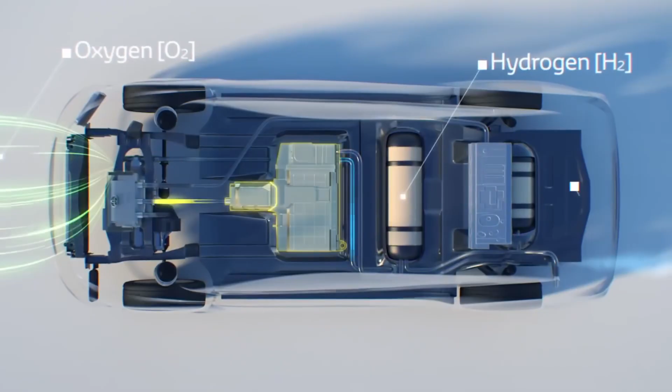And that's what we're going to talk about today. We'll dig into history, find out when humans first obtained this chemical element in its pure form, who invented the first hydrogen engine, and so on. We'll look at the advantages and disadvantages of this type of fuel, both from the production side and from the application side. And together, we'll try to clarify whether hydrogen is really the bright future that they are painting for us.

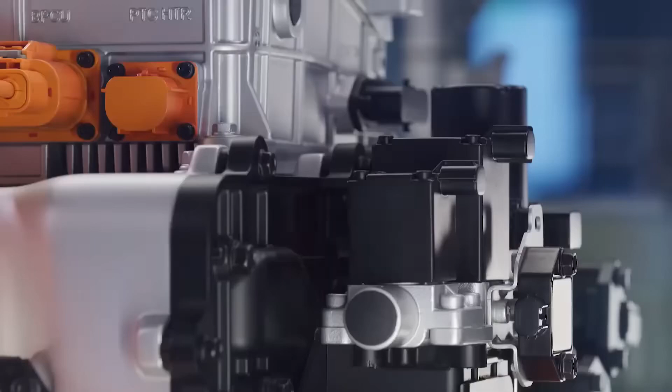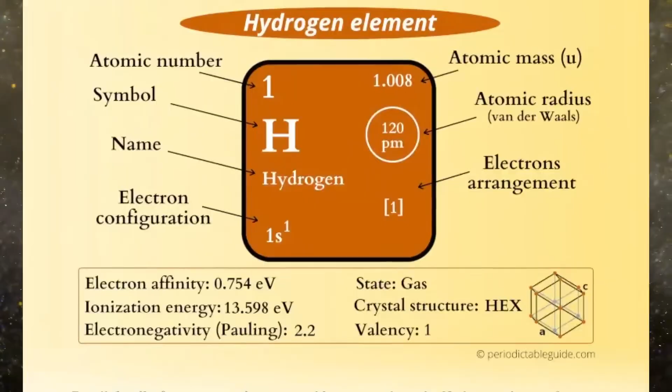Hydrogen, chemical symbol H, from the Latin hydrogenium, is a chemical element in the first period of Mendeleev's periodic table of chemical elements, with atomic number 1. Hydrogen is the most common chemical substance in the universe. It makes up 75% of the mass of all baryonic matter. Stars, except for compact ones, are mainly composed of hydrogen plasma. Hydrogen is the lightest element in the periodic table.

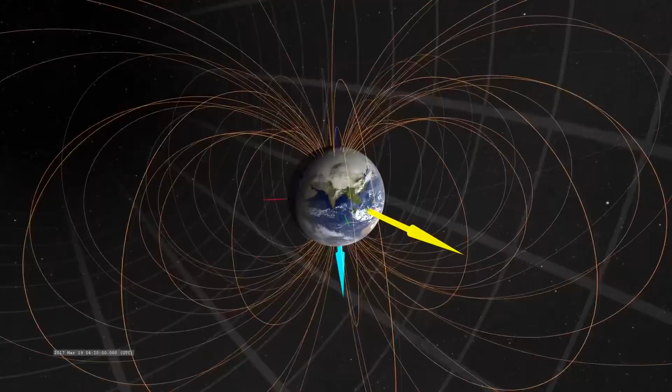However, despite being so common in the universe, it is difficult to find pure hydrogen on Earth. This element readily forms covalent bonds with most nonmetals. Therefore, in our reality, it exists in the form of organic and inorganic compounds. Water is the most vivid example among inorganic compounds. Since gaseous hydrogen is extremely light, it gradually escapes from the Earth's atmosphere. Every second, under the influence of the solar wind, the Earth loses 3 kilograms of hydrogen, which in the distant future will lead to the drying out of the planet.

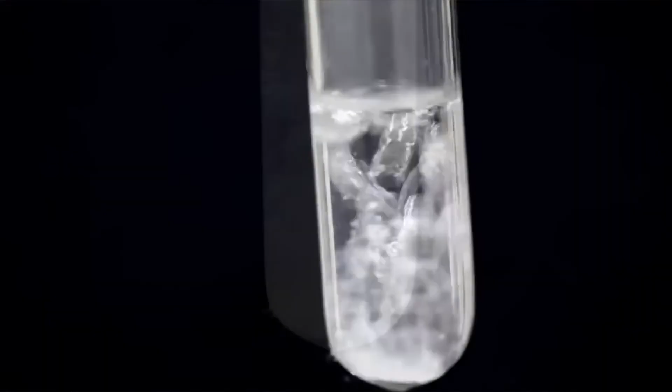Since most of the hydrogen on Earth is found in molecular compounds, it was discovered relatively late. The release of a flammable gas during the reaction between metals and acids was observed as early as the 16th century, during the formation of chemistry as a science. In 1766, the famous English scientist Henry Cavendish conducted a reaction between zinc and hydrochloric acid and studied the flammable gas produced. Cavendish called it inflammable air. When burned, this gas produced water, but Henry did not draw the correct conclusions and did not realize he had discovered a new substance.

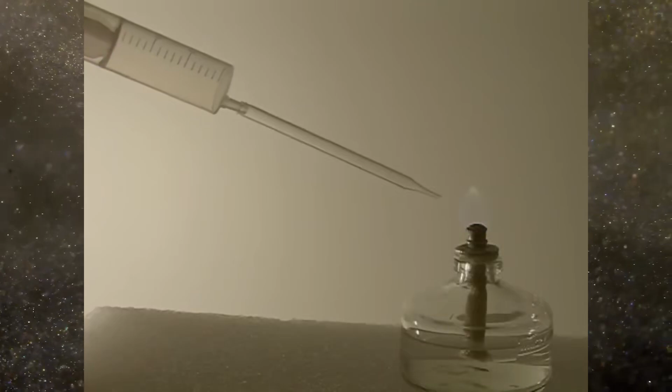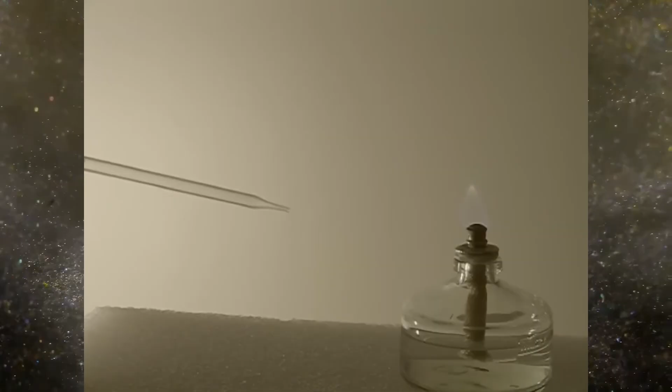The French chemist and naturalist Antoine Lavoisier, together with engineer Jean Meusnier, used special gasometers to synthesize water in 1783, and later analyzed it by decomposing water vapor with heated iron. Thus, the scientists were able to reach the correct conclusions. They established that flammable air is not only a component of water, but can also be obtained from it. In 1787, Lavoisier suggested that the gas under study was a simple substance, and accordingly belonged to the group of primary chemical elements. He called it hydrogen, which literally means water former.

And the combustible properties of this light gas could not go unnoticed by scientists and engineers. Moreover, with the development of applied sciences, the first prototypes of internal combustion engines began to appear, and at first, all sorts of things were used as fuel for them.

Hydrogen has long been considered one of the most promising types of fuel. Its combustion is extremely efficient, and the result is water vapor. And that's great news for environmentalists.

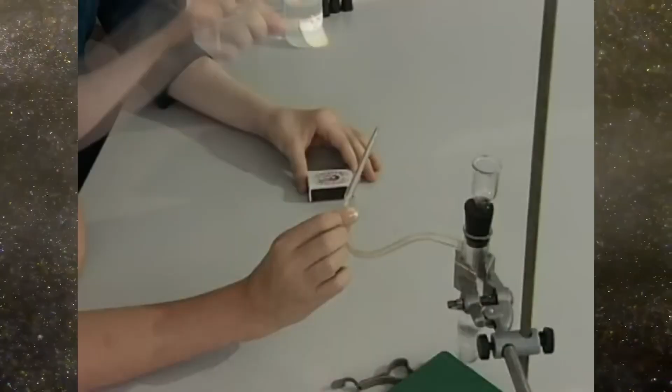The specific heat of combustion of hydrogen is about 120 to 130 megajoules per kilogram, which is several times higher than that of hydrocarbon fuels.

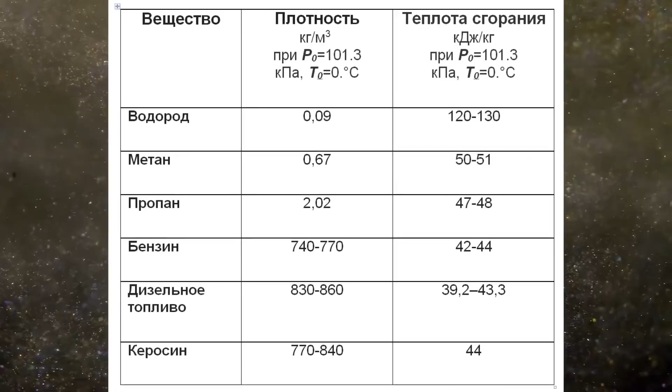Here's a quick table I put together that shows the most common types of fuel, along with their density and specific heat of combustion. Pay attention to the density. For example, methane is 7.5 times denser than hydrogen. So what conclusion can we draw from this? It's quite simple: using higher hydrocarbons makes the storage tank more compact, which is an important detail for vehicles.

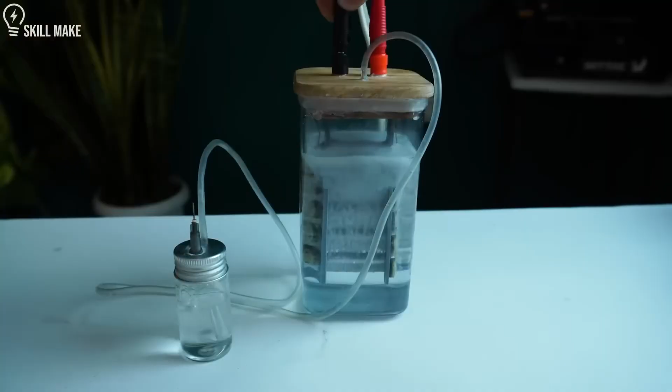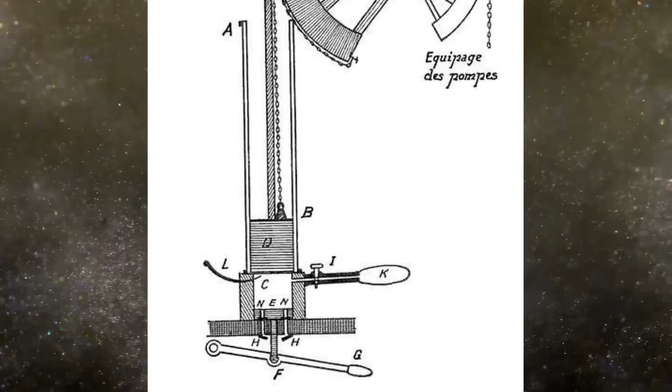Let's delve a little into history. The first engine running on hydrogen was invented in 1806 by the French inventor François Isaac de Rivaz. He produced hydrogen using water electrolysis. His engine was the first to use solutions that are still used in modern internal combustion engines, such as the piston group and spark ignition. However, the crank mechanism was not yet included in the design.

In 1807, de Rivaz equipped an experimental vehicle with such an engine, and in the same year he applied for a patent called the use of the explosion of lighting gas or other explosive materials as a source of energy in an engine. I want to emphasize that the first internal combustion engines were quite primitive and unreliable.

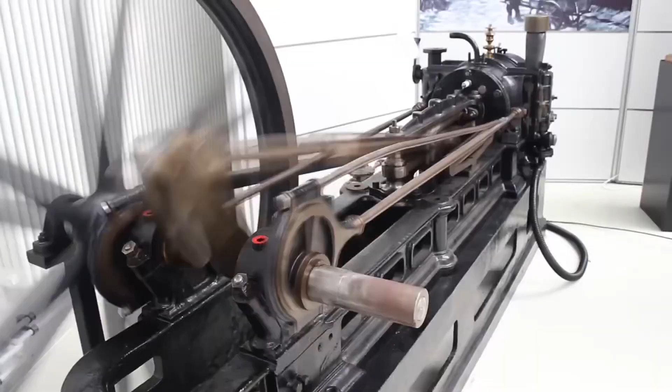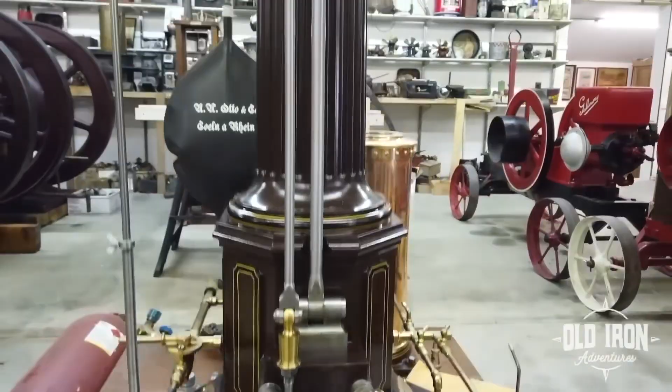It was considered a success if it could run on its own for at least 20 or 30 seconds. And only thanks to numerous attempts, improvements, and the work of hundreds and thousands of engineers did humanity eventually arrive at engines that could last for 1,000,000 kilometers.

The first patent for a hydrogen engine was issued in the United Kingdom in 1841. In 1852 in Germany, they built an internal combustion engine that ran on an air-hydrogen mixture. 8 years later, in 1860, the French inventor Étienne Lenoir designed the Hippomobile, the first versions of which ran on hydrogen.

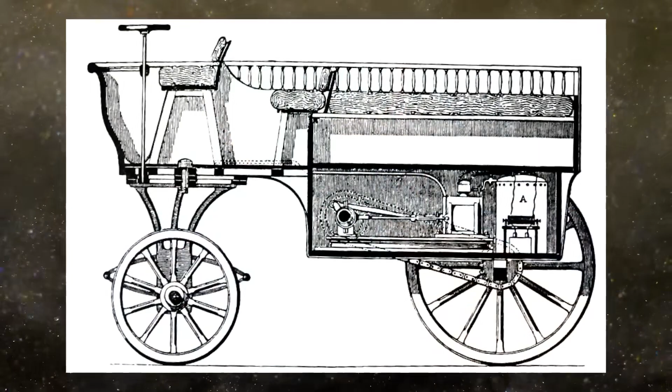The fuel gas was produced by electrolysis, which is where the name Hippomobile comes from - the ancient Greek hippos, meaning horse, because the vehicle constantly needed to drink. Later, Lenoir's car was adapted to run on illuminating and coal gas, and these models gained some recognition among buyers. For example, one of Lenoir's cars was made for the court of the Russian Emperor Alexander II.

In 1863, Lenoir tested the Hippomobile, driving it for 18 kilometers near Paris. Taking into account the stops along the way, the trip took 3 hours and required a huge amount of fuel.

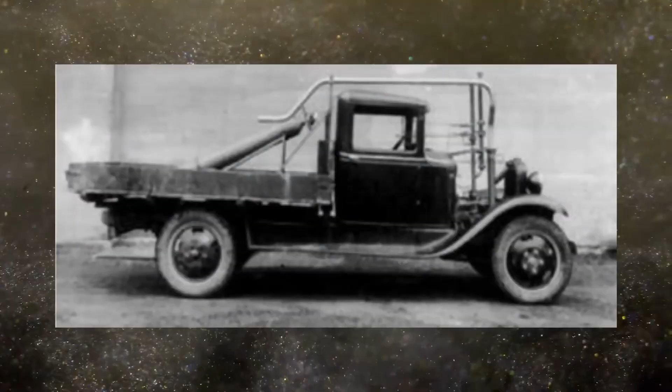In 1933, the Norwegian oil, gas, and metallurgical company Norsk Hydro converted one of its small trucks to run on hydrogen. The chemical element was produced by reforming ammonia and supplied to the engine.

In Leningrad, during the blockade, about 600 balloons operated on an air-hydrogen mixture. This solution was proposed by military engineer Boris Shelishch to solve the problem of gasoline shortage, which had already become scarce by the autumn of 1941. He also converted about 200 GAZAA trucks to run on hydrogen, as well as all the winches in the city.

In 1942, Shelishch was sent to Moscow to implement his technology in the Moscow air defense units. In the winter of 1941, the junior military technician was awarded the Order of the Red Star for his submitted R&D proposal.

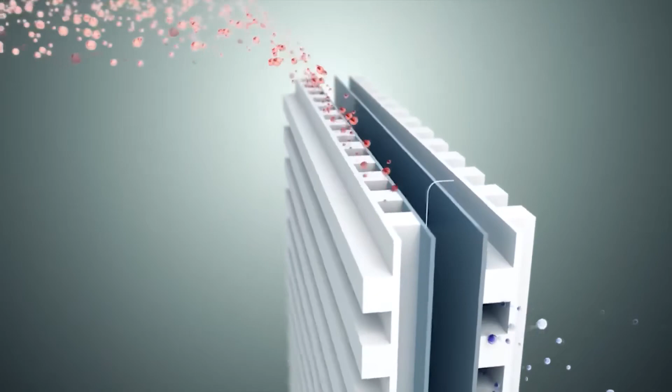However, everything we've discussed so far was based on the combustion of hydrogen in the cylinders of an internal combustion engine. But there is another way to generate energy: hydrogen fuel cells. They directly convert the chemical energy of the hydrogen oxidation reaction into electric current without the combustion process.

By the way, water will also be produced at the output of such a device, and you'll be surprised at how long ago such a fuel cell was invented - as far back as the year 1839. That's when the Welsh inventor Sir William Robert Grove developed the Grove cell.

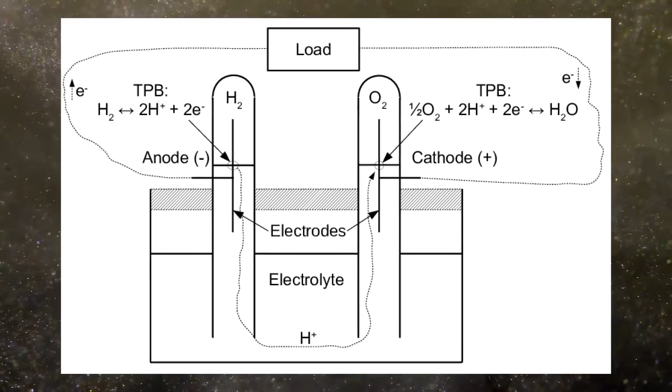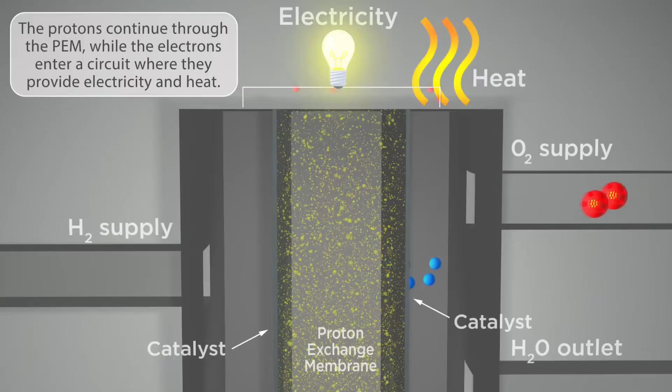William experimented with different types of electric batteries and discovered a potential difference on platinum plates immersed in a mixture of hydrogen and oxygen. It was only in the 1920s that research into fuel cells led to the development of solid oxide fuel cells, increased efficiency, and output levels that could be considered suitable for practical use.

In its quest to generate electricity through chemical reactions, the American company Allis-Chalmers, which produced machinery for various industries such as construction, agriculture, resource extraction and processing, as well as power generation and transmission, began research on hydrogen fuel cells in 1951.

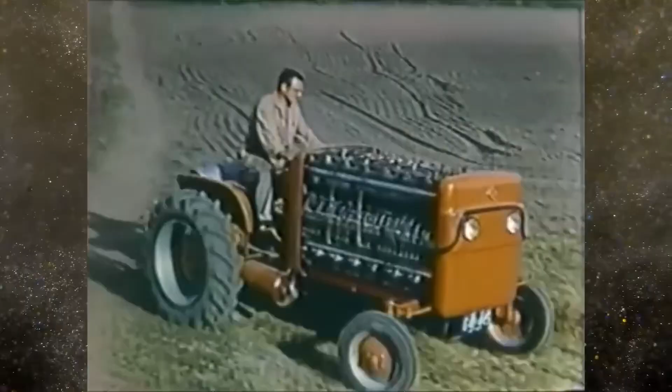On October 15, 1959, engineers from the Allis-Chalmers Research Division presented a hydrogen fuel cell tractor. This fuel cell tractor plowed a field of alfalfa with a two-bottom plow. It was an amazing sight - everything happened without the roar of engines, without a cloud of exhaust.

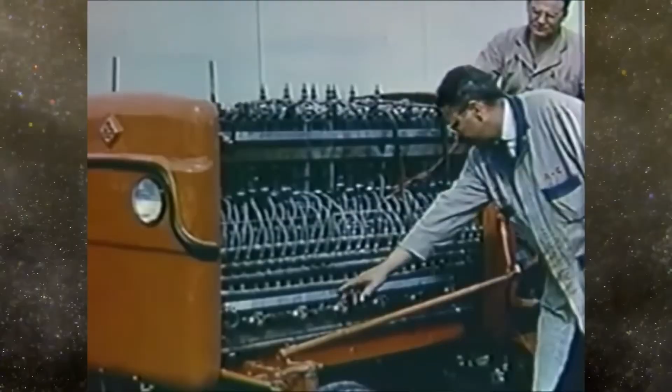The tractor housed 1,008 fuel cells combined into 112 blocks, each with 9 cells, arranged in 4 units, which generated power for a standard Allis-Chalmers 20 horsepower direct current motor.

For mass production, this tractor was extremely expensive, but it became a stepping stone that took the company to a new level. Allis-Chalmers developed fuel cells for the space program, and the United States military also contracted for some experimental fuel cell equipment. Subsequently, in the 70s, the company shut down the division and sold it to Teledyne Corporation due to funding cuts. After conducting tests, Allis-Chalmers transferred the fuel cell tractor to the Smithsonian Institution.

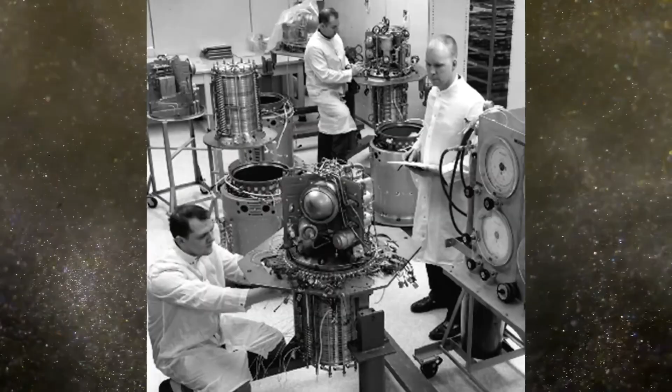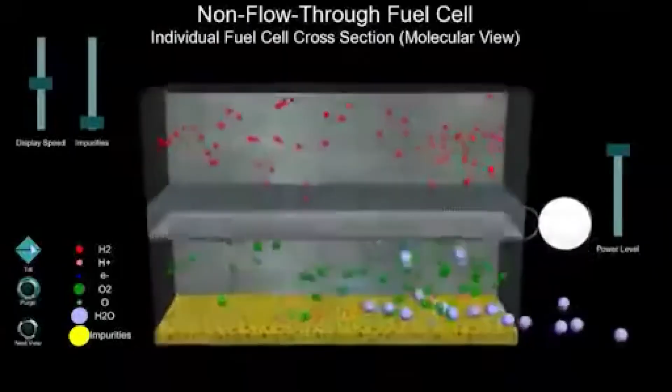The English engineer Francis Bacon, building on previous research, expanded the concept of the hydrogen fuel cell. His final design, the Bacon cell, was improved in 1959. Its fundamental principles were used in the development of fuel cells employed by NASA in their rockets. Hydrogen fuel cells for space had an interesting side effect: in addition to generating electricity, they produced water, which astronauts later drank.

I wonder if there will be commenters under the video who believe that humans have never been to space.

It was NASA's involvement that made hydrogen fuel cells a viable commercial resource. In the 1960s, the agency funded more than 200 research contracts, which gradually led to the creation of more compact and efficient hydrogen fuel cells that could be installed in cars, airplanes, and other vehicles. The first hydrogen fuel cell car was the Electrovan by General Motors in 1966.

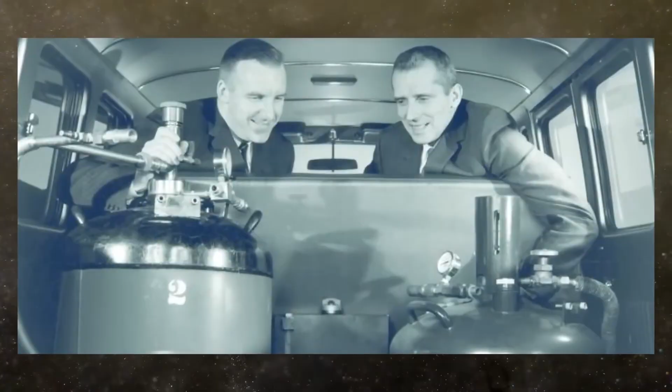The Electrovan was the brainchild of Dr. Craig Marks, who led most of General Motors' advanced engineering projects. Marks, together with 250 employees, developed the Electrovan for more than 2 years. The Electrovan used a fuel cell made by Union Carbide, which ran on supercooled liquid hydrogen and liquid oxygen.

Today's fuel cells use less pure oxygen, which is found in the surrounding air. The Electrovan had one large tank for hydrogen and one for oxygen. There were about 168 meters of piping running through the vehicle, and in fact, the 6-seat van was so packed with equipment that it could barely fit 2 people. The van was capable of driving up to 193 kilometers on a single fill-up.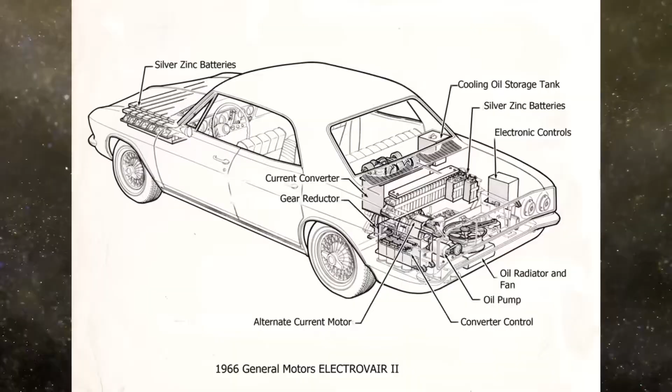It was built as a one-off technology demonstrator, and for safety reasons, was only driven within the factory grounds. General Motors had plans to equip and release a small batch with a similar setup, but the system was enormous. There were also multiple instances of hydrogen and oxygen leaks on the Electrovan prototype, and once there was even an explosion of the hydrogen tank.

Interest in hydrogen increased during the fuel crisis in the 70s, when an organization of the petroleum exporting countries' oil embargo led to an international shortage and rocked the industry. In the 70s, work was also being done in the Soviet Union to create prototypes of equipment running on hydrogen. During this period, various organizations, scientific institutes, and automotive institutes created prototypes of cars running on hydrogen and gasoline-hydrogen mixtures.

Among them were the Zhiguli, the 412th Moskvich, the 24th Volga, the Gorkovsky Avtomobilny Zavod 69, the RAF, and Ulyanovsky Avtomobilny Zavod minibuses, as well as the Zavod imeni Likhachova 130 truck. I'll say a little more about a couple of these prototypes.

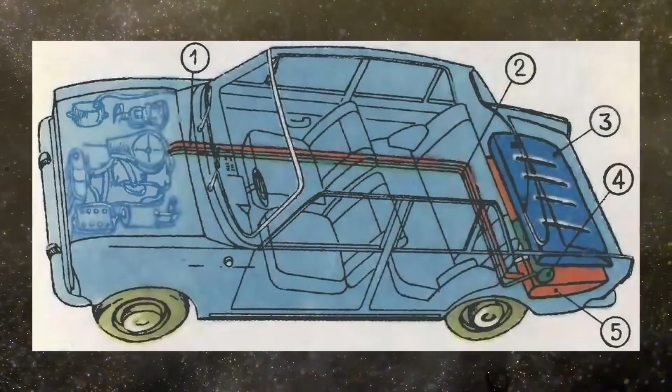In 1976, specialists from the Institute of Mechanical Engineering Problems of the Academy of Sciences of the Ukrainian Soviet Socialist Republic in Kharkiv built an experimental Moskvich 412 car with a power unit running on hydrogen. In addition to the usual gas tank, a mini reactor containing catalytic elements was installed on the Soviet sedan. Water passing through this reactor was split into hydrogen and oxygen, which then burned in the cylinders of the internal combustion engine. It is noteworthy that the fuel system for supplying hydrogen was installed in parallel with the standard gasoline system.

Starting from 1976, work was done on converting the RAF 2203 minibus to run on hydrogen fuel. Starting from 1979, it underwent laboratory and road tests as well as trial operation. Soviet scientists noted that the gasoline-hydrogen system showed low exhaust toxicity: carbon monoxide was reduced by 23 times and nitric oxide by 5.3 times. Fuel efficiency was also noted. Several hydrogen minibuses served the Olympic Village in 1980.

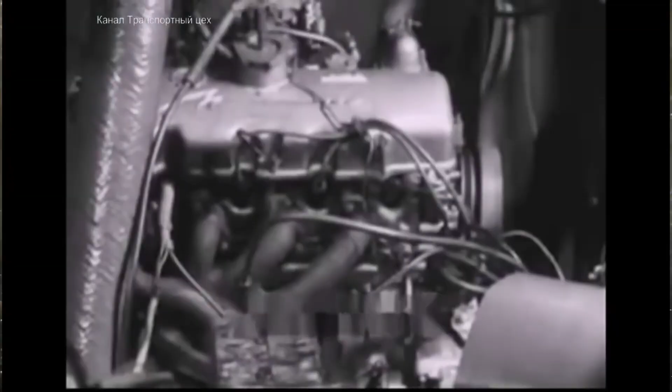Work was also underway in the Soviet Union on a hydrogen system for aviation. It was tested on a prototype Tu-155. A production car engine runs on hydrogen just like it does on gasoline. In 1979, the first BMW car with a hydrogen engine appeared.

This experimental prototype was created by engineers together with the German Aerospace Center based on the 520/4 model. On the outside, the car was hardly different from its gasoline counterparts, but its four-cylinder engine ran on hydrogen.

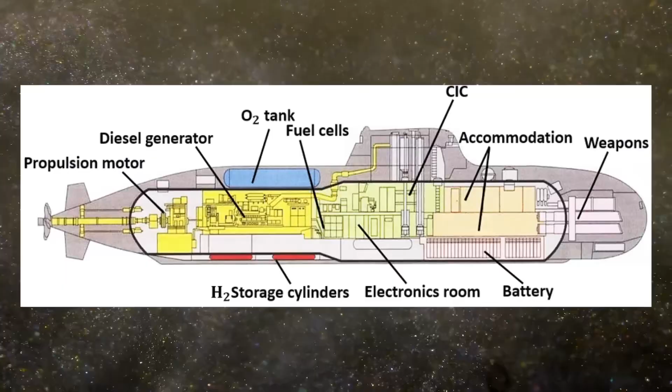However, after the fuel crisis ended, the idea of alternative engines was forgotten until the 2000s. The 21st century led to a significant boom in research and implementation of hydrogen fuel cells. In 2004, the German fleet tested a hydrogen-powered submarine, and China tested the world's first hydrogen train in 2015.

In 2007, BMW released a limited series of Hydrogen 7 cars that could run on both gasoline and hydrogen. But the car was not cheap, and the 8-kilogram gas cylinder was only enough for 200 to 250 kilometers.

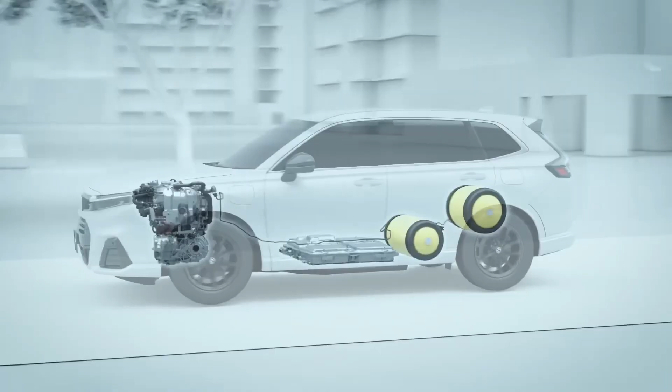The first mass-produced car model with a hydrogen engine was the Toyota Mirai, released in 2014. Today, hydrogen models exist in the lineups of major car manufacturers such as Honda, Hyundai, Audi, BMW, and Ford. Even a Russian premium car as a prototype was equipped with hydrogen fuel cells.

After 10 minutes of my story about various prototypes and the research of scientists in the field of hydrogen fuel, work on which has been going on for at least 100 years, a perfectly logical question arises. Why the heck is humanity still driving on gasoline and diesel? Well, lately a bit on electricity too. Why, despite many years of work and research, does sacred hydrogen still remain the fuel of the future and not of today? Let's figure out what's wrong with hydrogen.

How does hydrogen fuel look to the average person who hasn't really delved into the topic and has only heard about it from television news, eco-propaganda, on the internet, reels, and shorts? Hydrogen is the fuel of the future. It's eco-friendly. It's an inexhaustible resource. Not a single polar bear, pink flamingo, or unicorn will die because of such a car. And if you're thirsty, you can just suck on the exhaust pipe of this vehicle, because pure water comes out of it. Here's the approximate context.

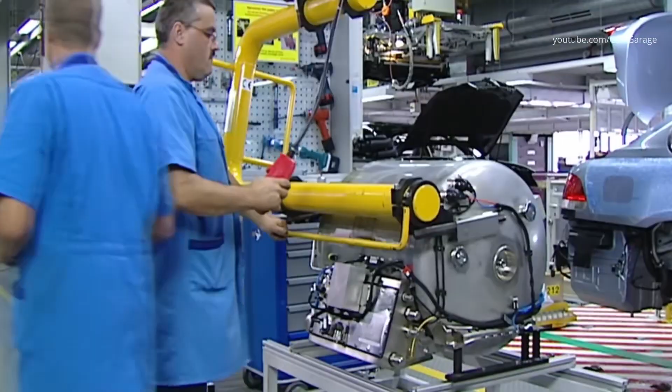Now let's go backstage and break it down step by step. The first obvious problem with hydrogen is that you can't just extract it from the earth, the ocean, or the atmosphere. It's not like natural gas or oil where you drill a well and pump the stuff through pipes. Hydrogen on Earth is bonded in molecules with other substances, and you need to apply a certain amount of energy to break those molecules apart and get pure H2.

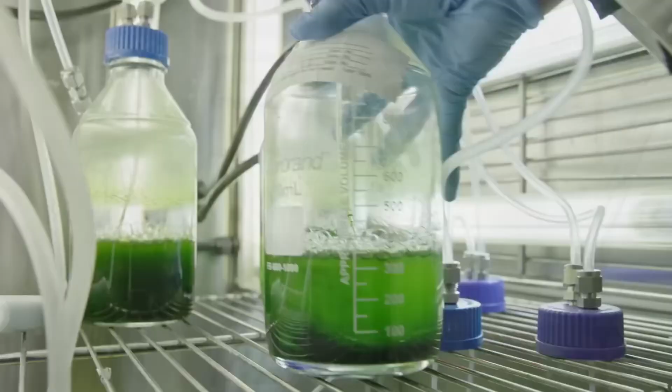There are several methods for producing hydrogen: electrolysis, where voltage is applied to electrodes and water is split into hydrogen and oxygen. This method is also possible with aqueous solutions of salts. There are several chemical methods: methane conversion with steam at 1000 degrees Celsius, passing water vapor over hot coke at about the same temperature, catalytic oxidation of methane with oxygen, cracking and reforming of hydrocarbons during oil processing. And in laboratories, hydrogen is produced in very small quantities as a result of the reaction of metals with acids and alkalis, with zinc and aluminum.

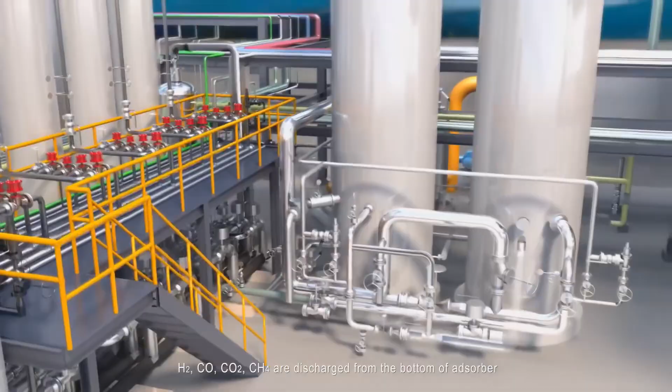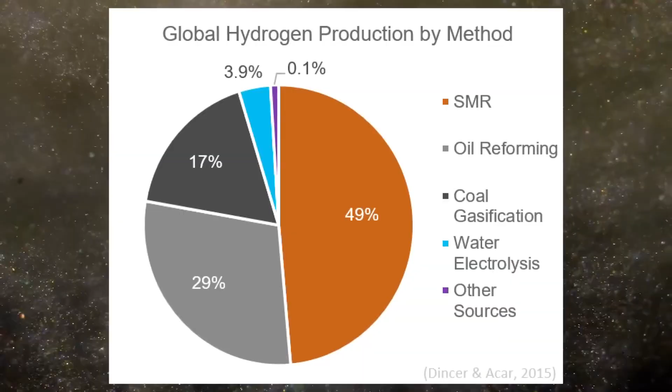As of 2019, 75 million tons of hydrogen were produced and consumed worldwide. Most of it is used in oil refining and in the production of ammonia. Three-quarters of this amount is produced from natural gas, and almost all the rest is obtained from coal. Only about 4% is produced by electrolysis.

And what is it? After all, there are so many videos from home do-it-yourself enthusiasts who use electrolysis to split water into hydrogen and oxygen. As an entertaining pastime and for producing small amounts of hydrogen, that'll do.

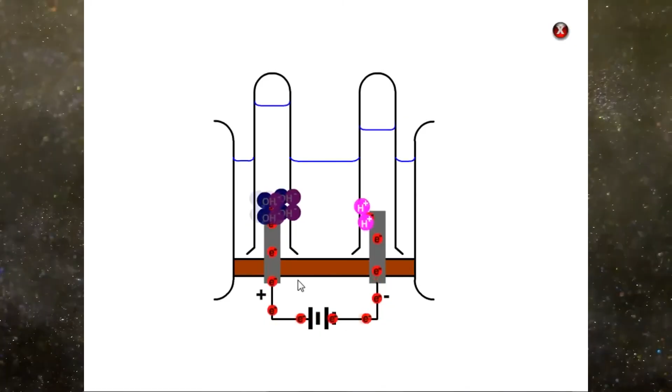But let's look at the energy aspect of the process. At the beginning of the video, you remember that burning 1 kilogram of hydrogen releases 120 to 130 megajoules of energy. Now let's calculate how much electricity we need to spend to produce 1 kilogram of hydrogen by water electrolysis. It comes out to about 50 to 55 kilowatt hours. If you convert that to megajoules, it turns out to be 180 to 198. So from an energy standpoint, this is an unprofitable process.

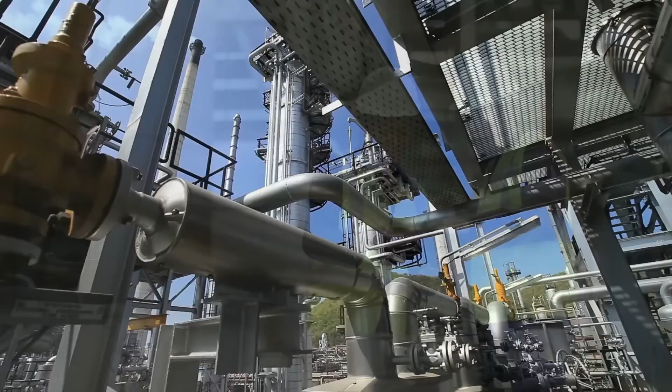By the way, do you know how much carbon dioxide is emitted when producing those 75 million tons of hydrogen used in global industry every year? 830 million tons. But how does that happen since hydrogen is so clean and innocent?

Look, there are at least 4 types of hydrogen based on how it's produced and the associated carbon footprint: brown, blue, gray, and green. Brown, as you might guess, is the dirtiest. It's produced by gasifying lignite coal. As a result, synthesis gas is formed, a mixture of carbon monoxide, carbon dioxide, hydrogen, methane, and ethylene, as well as a small amount of other gases.

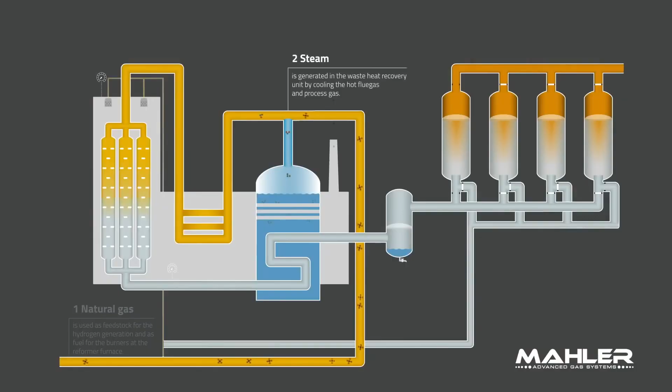Blue hydrogen is produced by steam reforming methane, but only if the carbon is captured and stored. This method is quite expensive. Gray hydrogen is produced by steam reforming methane, and more than 70% of our hydrogen is of this type. Natural gas is used as the raw material for this reaction.

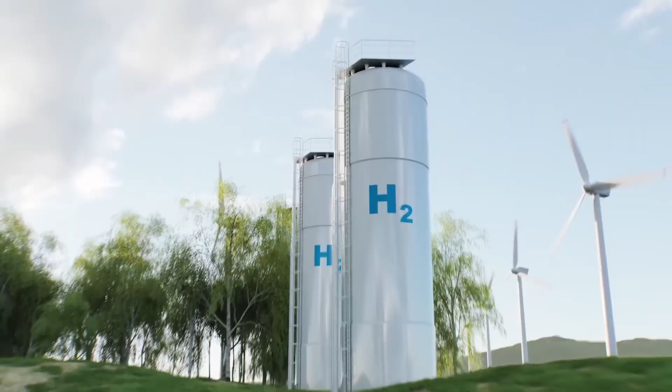Green hydrogen is the cleanest and is produced by electrolysis, provided that the electricity comes from renewable energy sources such as wind, solar, and hydropower. And there are no carbon dioxide emissions, although for some reason they don't take into account the emissions produced during the creation and installation of these facilities.

Different production methods lead to different costs of the final product. With the most common method, it's gray hydrogen. The cost of 1 kilogram of H2 ranges from $1.5 to $3 US dollars. With more expensive methods, the price can reach $10 per kilogram.

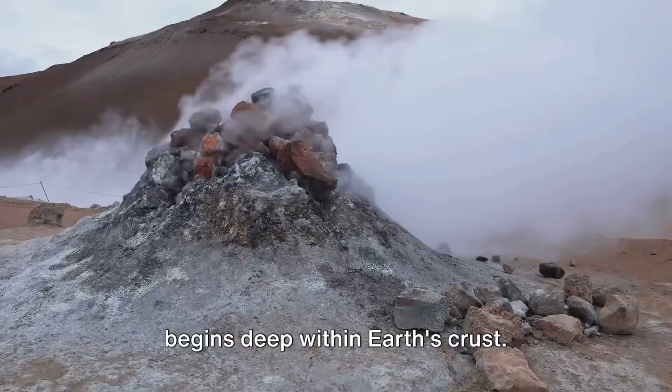There is also the so-called white hydrogen. It is produced by natural geological processes. This type of hydrogen was first discovered in 1979 in the mines of Mali. At the moment, scientists and engineers are puzzling over the possibility of extracting such a resource. However, since this gas is extremely volatile, the task will not be easy.

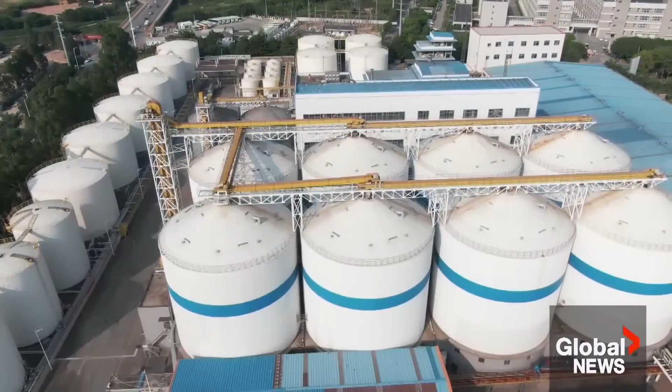So, we've briefly figured out how to obtain it. Now it's time to talk about storage and transportation. You do remember that hydrogen is extremely light. So in its liquefied state at a temperature below minus 253 degrees Celsius, its density is 71 kilograms per cubic meter of volume. For comparison, the same volume of water weighs 1,000 kilograms.

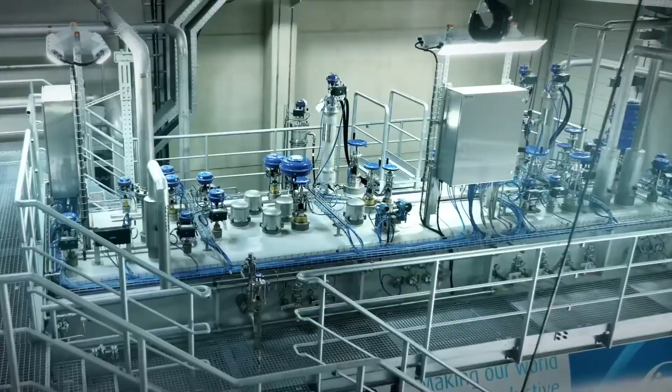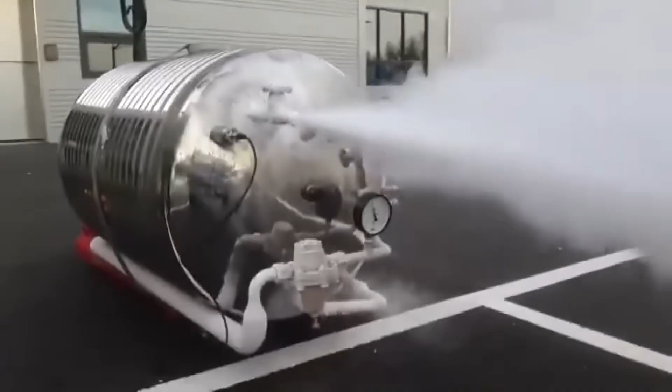Storing liquid hydrogen involves inevitable and quite significant losses due to its evaporation, up to 0.5% per day from tanks with a volume of up to 50 cubic meters. Larger tanks tend to have lower losses of this substance. Also, storing liquid hydrogen requires strict temperature control of the tank and high energy costs. In real facilities for producing liquid hydrogen, the energy costs range from 30 to 50% of its calorific value. Therefore, this method is very expensive.

In the case of storage in a gaseous state, hydrogen needs to be compressed to higher pressures than methane, for example, again because of the low density. After all, in a car, you can't really go wild with the size of the fuel tanks, but you still need to have a certain driving range on a single fill-up. That's why in modern hydrogen cars, the tanks are filled to a pressure of about 700 atmospheres. Under these conditions, you can store 39 kilograms per cubic meter of volume, but the strength requirements for the tanks are also very high.

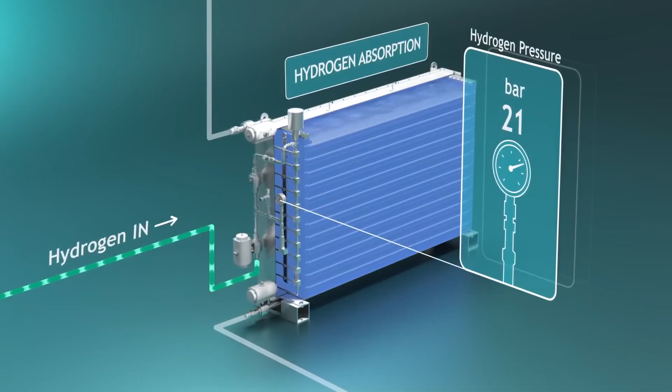There is also a third option for storing hydrogen, metal hydrides. I'll explain quickly and simply how this works. The H2 molecule is about 1.2 times 10 to the minus 10th meters in size. The size of a hydrogen atom, that is, a single proton with one electron moving around somewhere, is 0.529 times 10 to the minus 10th meters. The proton itself is 2.5 times 10 to the minus 13th meters. So one proton, the nucleus of the atom, is 211 times smaller than the atom itself.

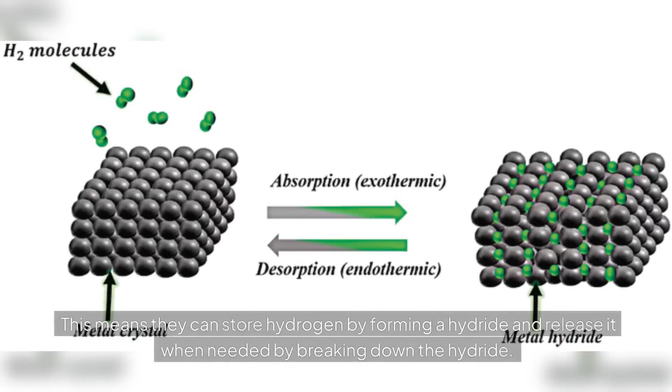Hydrogen has a very interesting property. When it comes into contact with certain metals and alloys, it loses its electrons, and what's left are pure protons, which then become embedded in the crystal lattice, and you can fit a lot of them in there. This reaction is reversible, which makes it possible to carry out loading and unloading cycles in metal hydride storage systems. With this method, the packing density can reach up to 150 kilograms per cubic meter. But the energy costs amount to 30 to 40% of the calorific value of hydrogen.

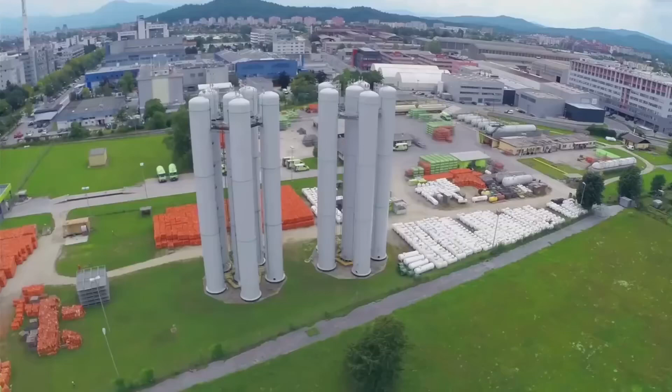There are also options with absorbents, organic carriers, and so on. It's worth remembering that any of these methods requires energy costs. Hydrogen needs to be liquefied, compressed to enormous pressure, injected into metal, and then extracted back, and so on. And at the moment, in the context of storing hydrogen on a vehicle, nothing more efficient has been invented than pumping 700 atmospheres into a cylinder.

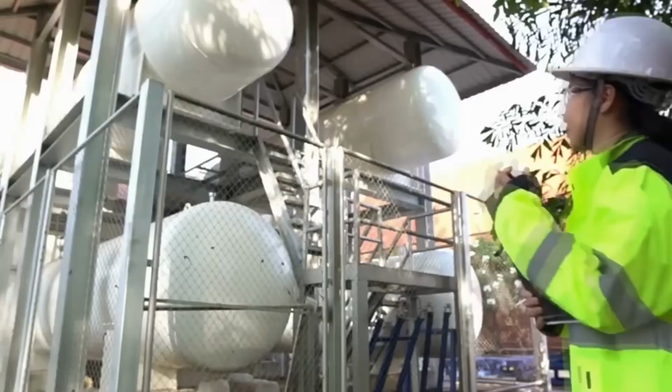The losses are only about 10%, and there is no magical breakthrough expected in the industry. Transporting hydrogen is another challenging task, and the problem lies in the hydrogen itself. It's the simplest and smallest element. It can seep through places where methane or ammonia would never leak.

This leads to a high fire hazard, and hydrogen flames are barely visible on a clear day. Because of these properties of the most common element in the universe, hydrogen pipelines and storage tanks have much stricter requirements for sealing and material quality. Therefore, in today's reality, most hydrogen is produced at the point of use, that is, near petrochemical plants and ammonia production facilities.

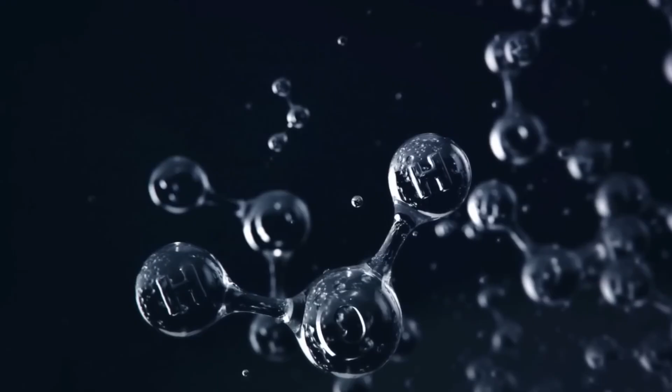The longest pipeline at the moment is located in France and Belgium and is only 400 kilometers long. Experimental studies on the possibility of transporting hydrogen using steel pipelines for natural gas have shown that hydrogen losses from the system are 3 to 3.5 times greater in volume than natural gas losses. Moreover, delivering hydrogen through a pipeline requires 3 times more energy than delivering natural gas for the same amount of transported energy.

It's worth mentioning a bit about the infrastructure. There are currently few hydrogen fueling stations in the world. All the difficulties with storage, transportation, fire, and explosion hazards also apply to them and affect their cost. And building the infrastructure, which is very expensive and may not even pay off, is really not easy.

In the context of the difficulties of transportation and storage, all dreams of a hydrogen economy assume small and distributed hydrogen production systems, which leaves us with only one realistic option: electrolysis. Such production should be handled by competent organizations with strict adherence to safety regulations, occupational health, and so on. You can't just hand over hydrogen production to the masses.

Personally, I wouldn't want my neighbors producing H2 at 600 or 700 atmospheres of pressure using solar panels. To hell with neighbors like that.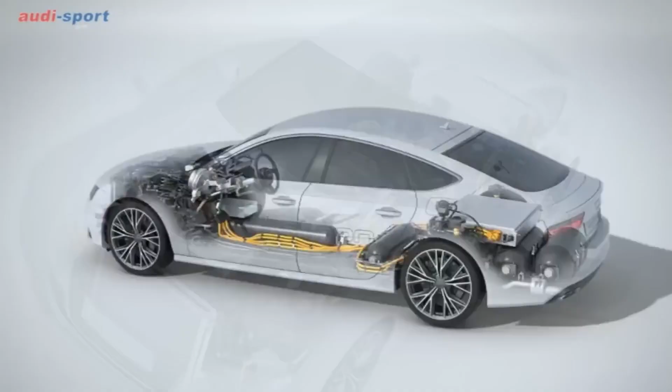And finally, let's look at the efficiency of hydrogen-powered cars themselves. As you understood from the narration, there are 2 ways to extract energy from hydrogen and turn it into motion. In the first case, we have a classic car with an internal combustion engine, and the air-hydrogen mixture burns in the cylinders. But there are problems.

If you don't change anything in the internal combustion engine, the power drops by 20 to 35%. If you make changes to the ignition system, you can even achieve 10 to 15% more power. However, in this case, the temperature in the combustion chamber increases, and so does the risk of burning out the valves. You remember that hydrogen is extremely fine.

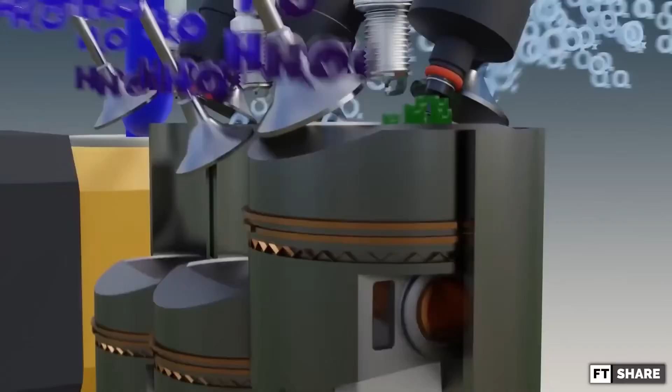So, at the temperatures and pressures in the combustion chamber, it can penetrate the metals the engine is made of, which reduces their strength characteristics. In short, a hydrogen internal combustion engine wears out much faster, and engines that last 1,000,000 kilometers are out of the question. So internal combustion engines are poorly suited for running on hydrogen.

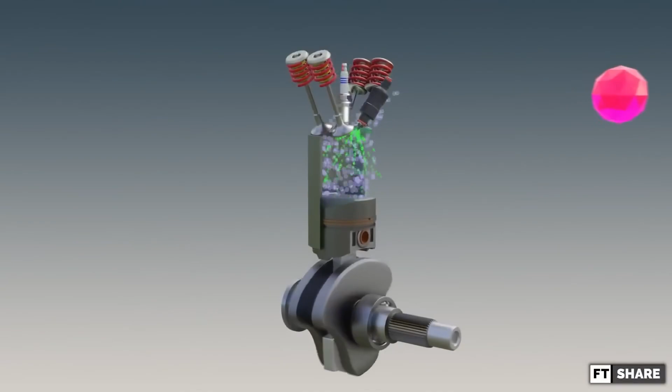And I wouldn't get too excited about Toyota's presentation of their new hydrogen engine. And finally, in today's reality, when 95% of all H2 comes from fossil hydrocarbons like gas, oil, and coal, it's more economical to just burn those hydrocarbons directly in the engine.

Now it's time to talk about fuel cells. Basically, we have a hybrid car where hydrogen is converted into electricity. This means that for real-world use on the roads, in addition to the hydrogen system, you also need a battery, which will be required for the fuel cell's own needs and other car systems, as well as for smoothing out the production and consumption of electricity during driving and regeneration.

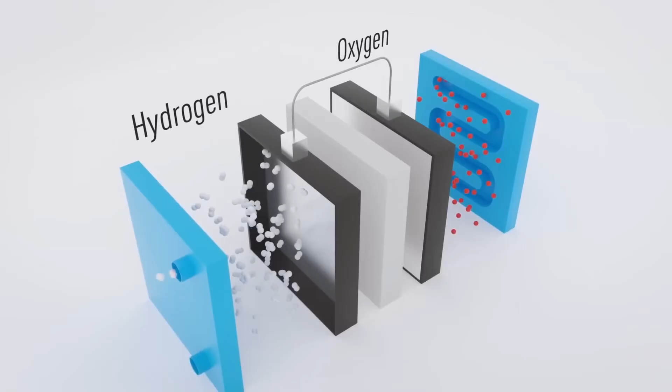Modern fuel cells have an efficiency of 50 to 55%, and that's not far from the theoretical limit of 83% for an ideal fuel cell, according to the Gibbs function. So let's take an efficiency of 50%. That's better than an internal combustion engine.

But wait, after calculating all the losses in the chain, starting from solar panels and wind turbines, water electrolysis, transportation, hydrogen storage, electricity generation in the fuel cell, and losses in electric motors, in the end, we get an efficiency of about 22%. And this chain is calculated for green hydrogen.

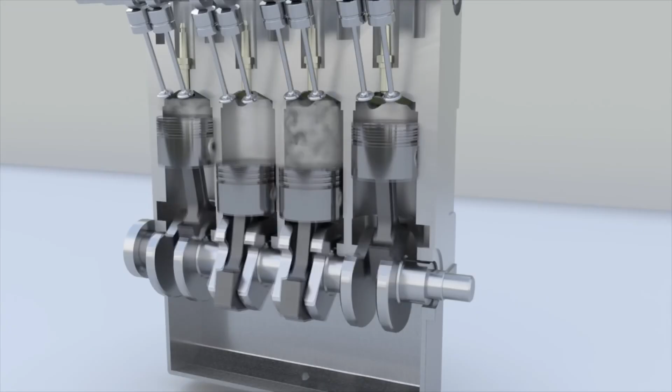We don't want to kill the planet with emissions. And modern car internal combustion engines have an efficiency of 30 to 35%. It turns out to be the same efficiency as electric cars in the chain from burning fuel at a power plant to moving through space.

Do you remember Asafiev's calculations in the episode about Tesla? That efficiency was calculated under the conditions of storing hydrogen in a gaseous state in a cylinder. But if you calculate it for metal hydrides or liquefied hydrogen, the efficiency drops to 13 or 14%. The only advantage of a hydrogen car is a higher refueling speed compared to electric battery vehicles. But is it worth such low efficiency?

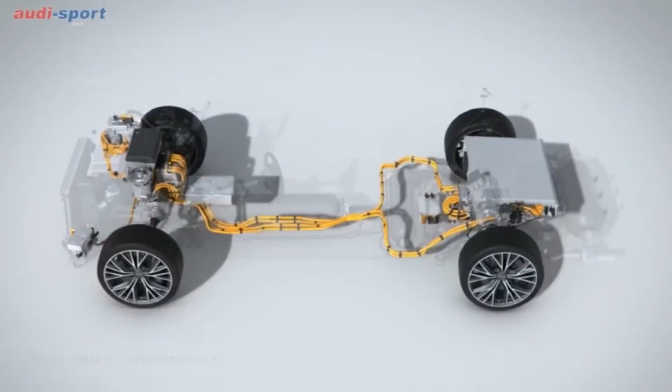Also, fuel cell cars cost as much as a wing for a Boeing, because the cells use platinum and palladium, which are not the cheapest metals on the market. It's also important to remember that fuel cells require very pure hydrogen. For example, carbon monoxide impurities, which are present in brown, gray, and blue hydrogen, significantly reduce the efficiency of the cells. Carbon monoxide acts as a so-called catalytic poison for them.

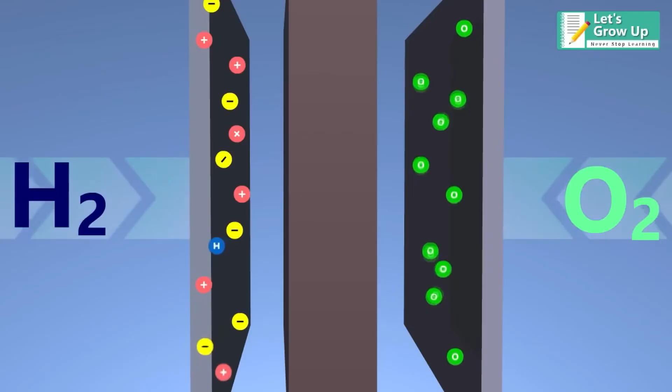There is a rather old video in which Elon Musk calls the concept of a hydrogen car with fuel cells foolish. There is a debate about the efficiency of hydrogen fuel cells, as he believes this concept is extremely foolish. And yes, on one hand, Musk is quite a talker — the value of several stocks can depend on just a few of his words, and he needs to promote his electric Teslas. But on the other hand, Elon is not a stupid guy. He knows how to calculate compound interest and understands that efficiency can't be greater than 1.

After the numbers mentioned in the previous chapter, and after I figured them out a bit myself, it becomes clear that the guy who wants to fly to Mars isn't saying such nonsense after all.

People who are enchanted by the idea of a bright hydrogen future are probably already spitting at their screens and writing angry comments. I love you too, guys. And of course, I got paid off by the oil guys. Yesterday, the Gazprom people brought me a suitcase, and the day before that, Shell dropped by for tea. Unfortunately, that's not how I wish it was.

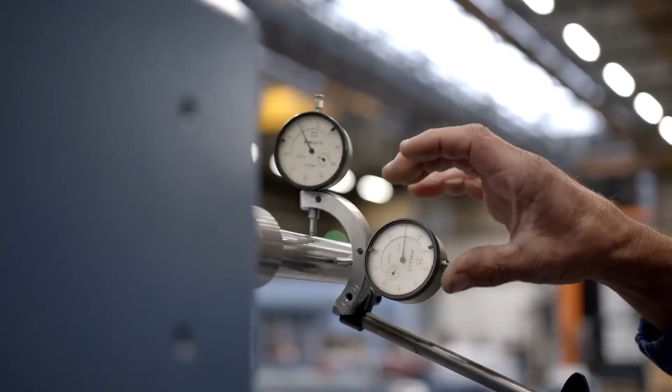You can claim as much as you want that now they'll put up a bunch of wind turbines and solar panels, and all the energy will be green and everything will be fine. And then there will be plenty of green hydrogen, and it will become cheaper, and hydrogen cars will become more widespread and cheaper to produce, and the refueling infrastructure will follow. But all of this comes down to such crazy financial costs that even under ideal conditions, without crises, wars, or disasters, such a transition would take at least half a century.

In theory, white hydrogen could help the hydrogen future a little. In Kansas, they seem to be planning to drill a test well in 2025. Whether it will be possible to establish commercially viable extraction, time will tell. I think it will be very difficult.

As you can see, the devil is in the details, and he's not really hiding that much if you look even a little closer. In fact, we have a technology that has already hit physical and chemical limitations. A technology that politicians and populists mention to gain popularity ratings and points before elections. A technology that men in suits and ties use as a pretext to spend budgets. And ecology is just a beautiful cover, something like that. Maybe a bright energy future will come someday, but definitely not tomorrow and not in 10 years.

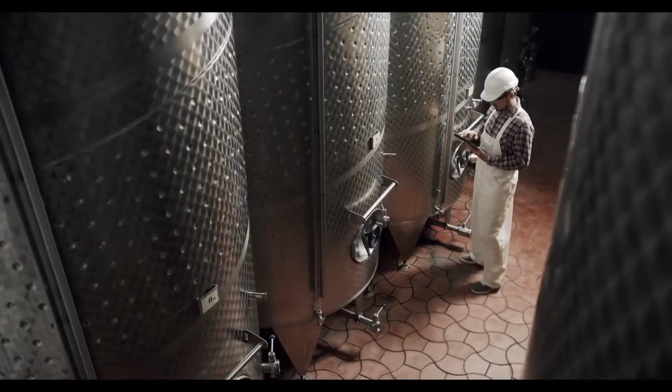Many people will probably argue that it's those damned oilmen who are preventing alternative technologies from developing. I have a counter-argument for you. The big shots in the energy business have every opportunity to take alternative developments, patents and scientists under their wing so they can later milk a different cow. That's all. If you can't prevent it, lead it. Who said that, Machiavelli or Suvorov? I can't remember. In this world, everything is subject to logic and economic feasibility.

So I don't know about anyone else, but I'm going to roll out my Yamaha, fill up the tank with 95, and go enjoy myself. That brings my story to an end.